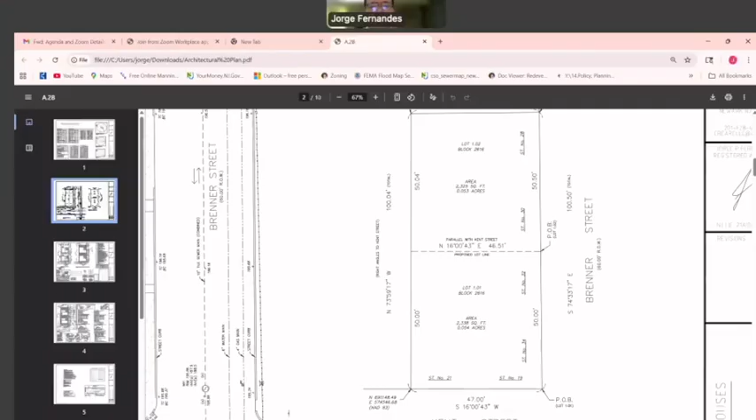Obviously they're slightly undersized. 2,500 square feet is required for a two-family home. But as things stand today, both of the lots are still undersized for the construction of a two-family home.

The proposed site plan, shown on my S2 page, will face Brenner Street as opposed to Kent Street with our entrance and garage. The first house on the corner, instead of having a rear yard per se, will have a side yard that's a grass area 12 feet 7 inches in width. The other house, further into the property, will have a side yard that's 13 feet 1 inch. Those side yards are meant to be used as the rear yard for the property, for tenants to have a green space. That's also where the trash enclosure and HVAC enclosures will be.

Typically in two-family construction in Newark, where we have a lot that's 25 by 100, those amenities are in the back or rear. In this case, we are on the side.

The rear will have a 3'8" to 4-foot setback, as well as a 3-foot and 3'5" setback for the other house. We'll be incurring a variance there because the rear yard needs to be 30% of the lot length, so we obviously need a variance.

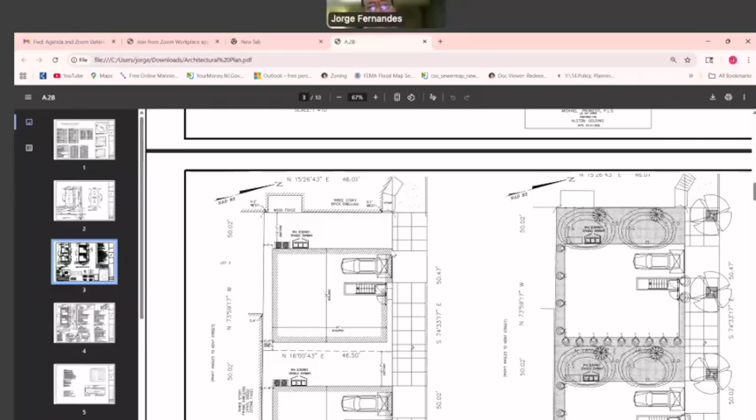I believe we're complying with the front yard setback, as the neighboring property to the west has a frontage on the property line, as do we. We are showing a frontage of our garage on the property line, so I believe we're in keeping with the streetscape on Brenner Street.

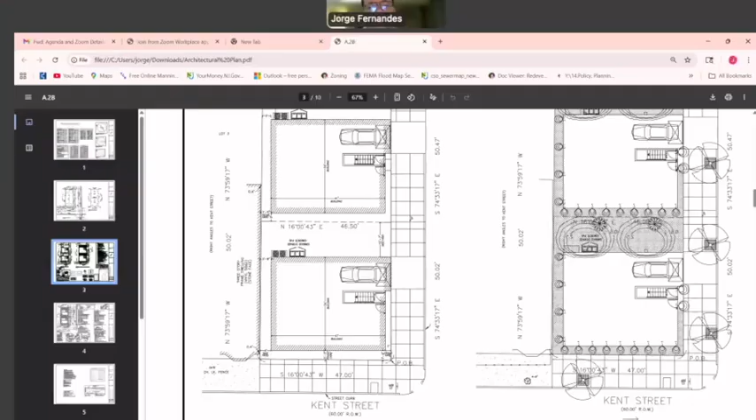The proposed house is 34 feet in width by 41 feet in depth. I can go over the floor plans right after I go over the trees.

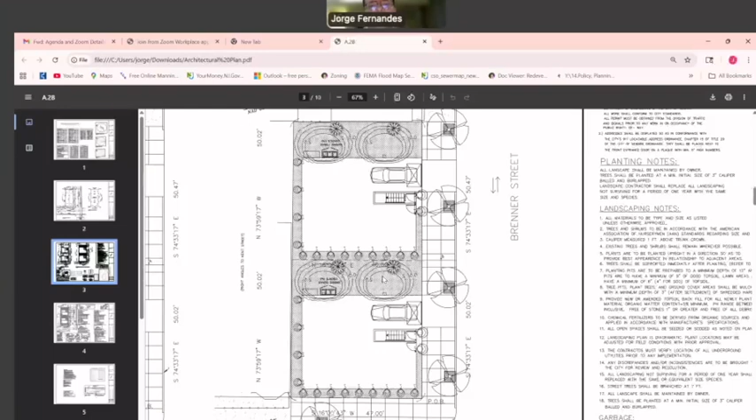We'll be able to plant 4 shade trees on Brenner Street and 1 tree on Kent Street, sidewalk shade trees. We can also plant 2 on-site trees on each of the properties in the side yard, so you'll have 2 trees in the side yard for each of the houses.

The floor plan I could get into now on the A1 of the submitted floor plans. Again, we'll have a 2-car garage in tandem. Now I believe only 1 car is required for a two-family home, but we're providing 2 spaces in tandem. And of course, the front entrance of the house, where you have your front door all the way to the left, gives access to a 573 square foot recreation area that is interiorly connected to the 2nd floor apartment.

These are meant to be used in conjunction, and this is really the only entrance for this apartment. You have this door here to the left that gives you access to both the 1st floor as well as the 2nd floor. And then there's another door that gives access to stairs that give you access to the 3rd floor apartment. The reason we do that is to have separate entrances for each of the apartments, so that we don't have to install a sprinkler system per the building code.

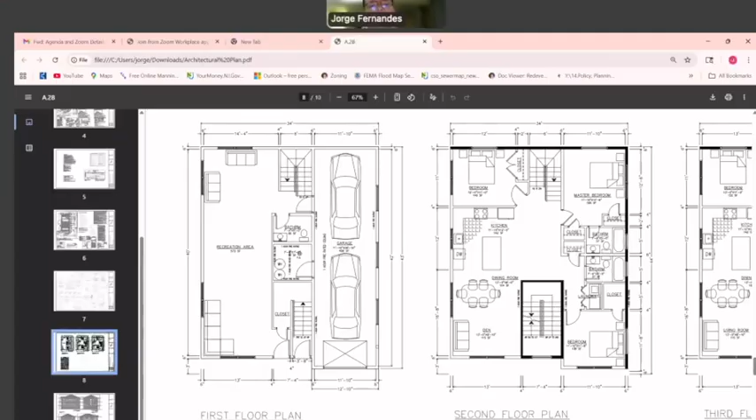The 2nd floor plan is a 3-bedroom unit. It has a kitchen, living room, 2 baths, and a laundry closet, and of course the stair that goes back down to the rec space and to the garage. The 3rd floor plan is also a 3-bedroom with 2 baths, living, dining, a kitchen, and a laundry closet.

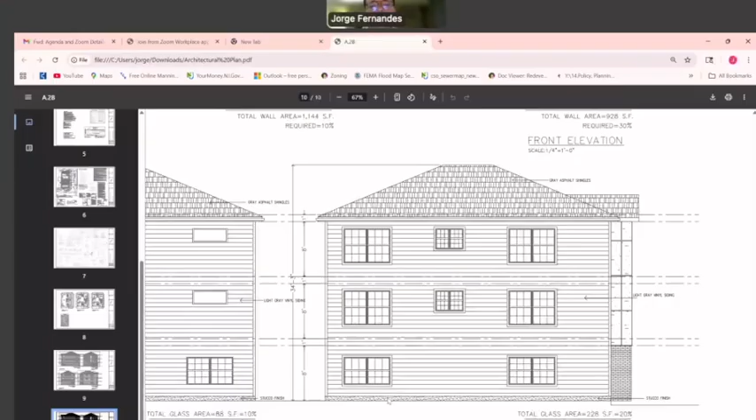This is the house that's further into the property, that is not fronting on the street on 2 sides. Therefore, we only have the stucco finish on the front and vinyl siding on the sides and rear. Again, we are complying with the glazing requirement on this house as well for all of the elevations.

That pretty much concludes my testimony to the project. I'm open to any questions. Commissioners, any questions or comments?

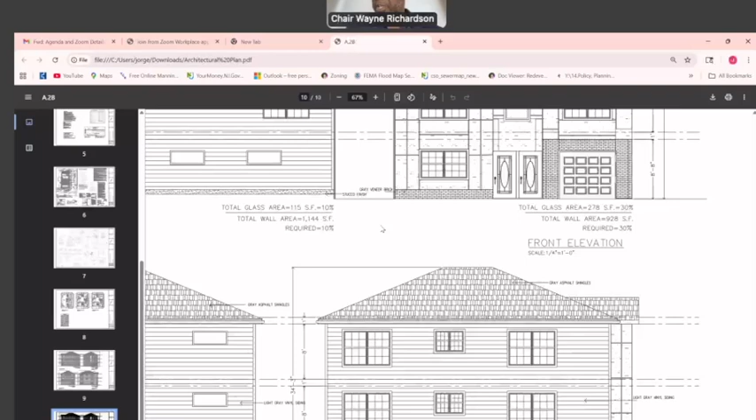I have a question. Did you say something about the sprinklers? Did you find a way not to have to put in sprinklers, or did you say you found a way to put in sprinklers? It's a code requirement. We will not be installing a sprinkler system because we have 2 separate entrances for each of the apartments. So that allows you not to have to put in sprinklers? Exactly.

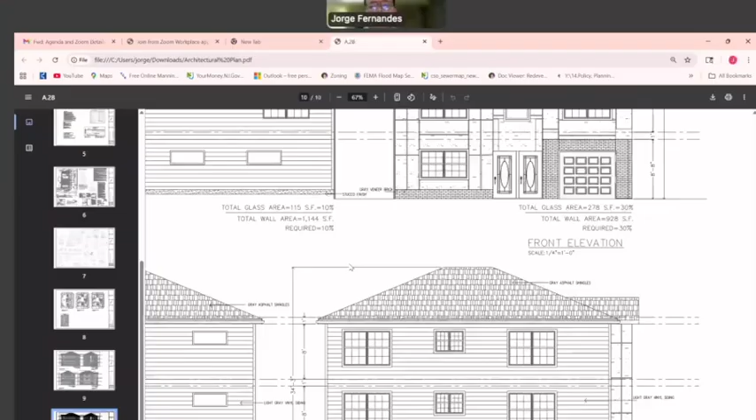Did you put up a color rendering? I have one, yes. Put it up. Here are the houses side by side, again with different colors. One has a lighter stucco finish, the other one has a darker stucco finish. And again, this is the grass on the side yards that are effectively the rear yard of the home.

Mr. Fernandes, what type of material is that on the exterior? That is a stucco finish. Is the entire exterior all stucco? Yeah, we'd have some masonry, brick masonry on the stairs and also around the garage door.

Do you have a rear rendering of this? No, just the front. Okay, and there's no exterior fencing, correct? We'll have fencing in the rear of the building, but not in the front. And what type of fencing is that? In the rear will be a privacy fence, 5-foot vinyl as permitted by the zoning ordinance.

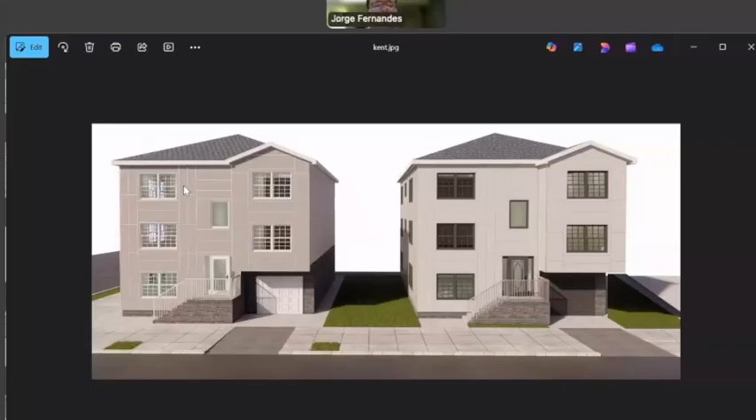And there's no retaining wall. No retaining wall. Thank you. And the back is vinyl siding, right? Yes, the rear. If in this case we're looking at the front, the rear would be vinyl siding. The side on Kent of this house here. I'm sorry, the other side on Kent will also be the same stucco finish. Okay.

All right, commissioners, any other questions or comments? If Mr. Hockaday could just mark this exhibit as A1. Certainly, thank you.

All right, hearing none, any questions or comments from the public? Seeing none at this time, Chair. In that case, I need a motion.

Motion. Second. Moved by Commissioner Roundtree, second by Commissioner Purdy. Roll call, Madam Secretary. Commissioner Byers, Yes. Commissioner Timmons, Yes. Commissioner Scott Roundtree, Yes. Commissioner Purdy, Yes. Commissioner De Silva, Yes. Commissioner James, Yes. Co-Chair Richard, Yes. Chair Richardson, Yes. Your application has been approved. Good luck. Thank you.

Let's move back to number 3 on the agenda. CPB 25-13, which is 96-126 Roanoke Avenue. Joseph Paparo.

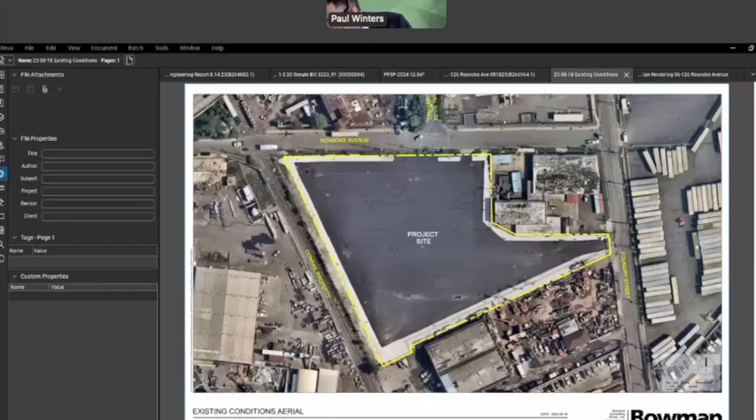This is an aerial of the site in question, titled Existing Conditions Aerial for 96 to 126 Roanoke Avenue. This depicts aerial mapping upon which we identify our project site. This is prepared by our office, dated today, August 18th, 2025. Is it Exhibit A1? Is that appropriate? Okay, great, thank you.

So as I mentioned, this is an aerial exhibit from NearMap, which is an online resource that shows generally very recent aerial imagery, so this is current. The yellow line around the perimeter of the site identifies where our property is located. As you can see, we have two frontages of the street. To the north, we have Roanoke Avenue as our primary frontage. To the east, we also have a limited frontage of approximately 40 linear feet on Foundry Street. Our frontage on Roanoke is about 400 feet. We're adjacent to a few other lots.

There's a lot immediately to our northeast with an industrial use on it that separates us from the intersection of Roanoke Avenue and Foundry Street.

We're also adjacent to an industrial property immediately to our south, which has a truck operation and vehicle storage, which you can clearly see from this image. And we're also adjacent to a Conrail railroad right-of-way immediately to our west, and other industrial uses in that neighborhood too.

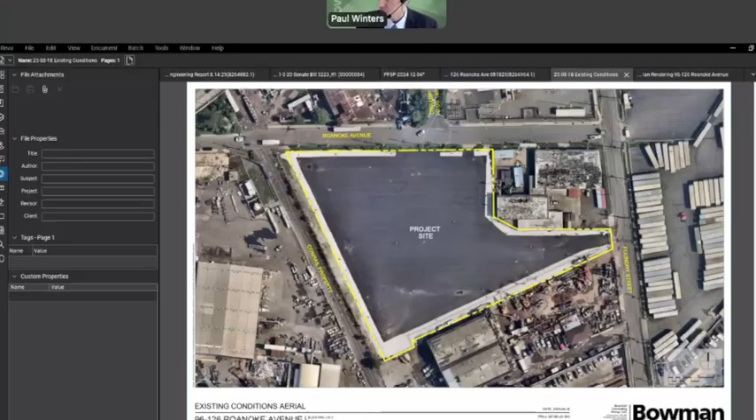Beyond that, I'll also note there's an on-ramp directly to US 1 and 9 to our north, right here off of Roanoke Avenue.

As was mentioned, I believe in the opening, but I'll mention for record, we are in the I-3 heavy industrial district. The existing use today is, as you can see, a vacant site. It has been capped in accordance with environmental remediation requirements. Our proposed use will be to put a truck trailer parking facility on this previously capped site.

The overall site area, just also for record, is approximately 3.29 acres. As you can see, it's been capped, so the majority of the site has a paved cap upon it. That's just a quick overview of the existing condition of this property.

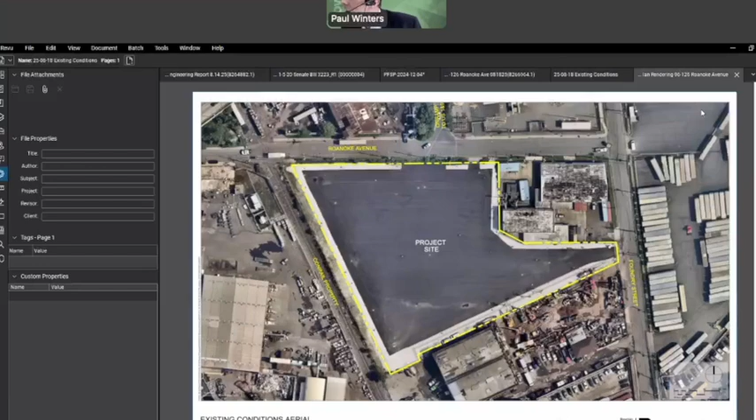I have a secondary exhibit I'll bring up in a moment, which is a similar exhibit, but for the proposed condition, which I assume we're going to sign in as Exhibit A2 in a moment. Here is that exhibit now. This is titled Site Plan Rendering, also prepared August 18th, 2025.

Using the same yellow boundary to identify the outer boundary limit. As you can see, in the center part of the site, the paved cap remains. We're seeking to stripe it and make it available for the truck trailer parking facility proposed on the site.

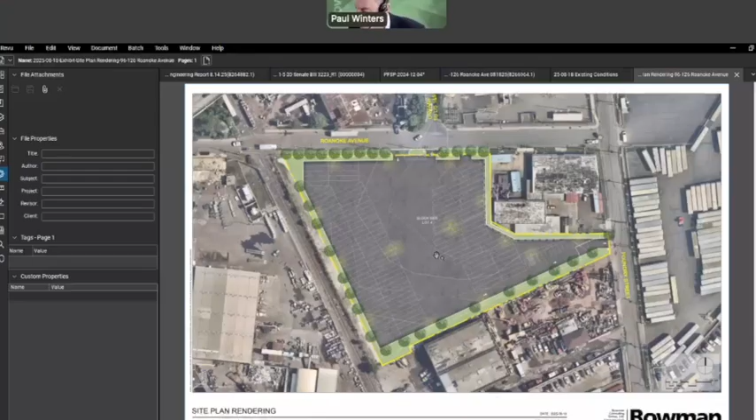Other improvements included with this are site lighting. You can see we've identified those lighting locations scattered through the site. I could zoom in just a little bit for the benefit of the board seeing this exhibit there.

That might be easier. I also want to note with this, and we'll talk about this a little bit more shortly, we are proposing some other improvements, many of which are in accordance with the zoning standards. A new decorative fence, which is a zone standard, is proposed along the frontage of the site. There's existing chain link fence that will be replaced along the frontage with that decorative fence pursuant to the detail provided in the submitted plans. Most of the perimeter chain link fence will remain except for where we're replacing along the adjacent property to our northeast.

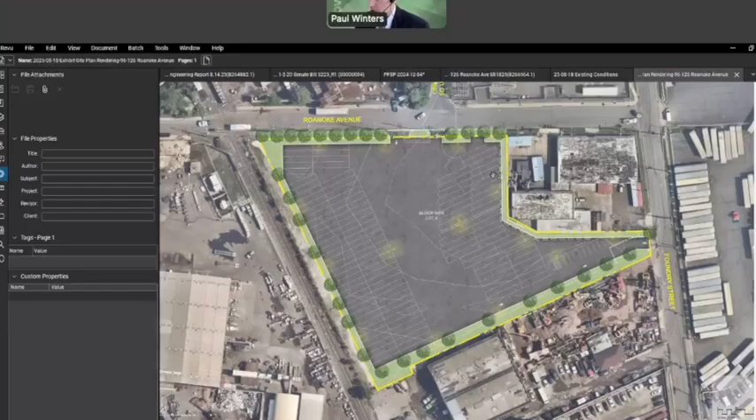We are proposing a number of trees in accordance with both the street tree and the shade or on-site tree requirements. One departure from the submitted plan: in this exhibit we have added additional trees than depicted in the submitted plan. Just want to bring attention to that. It was mentioned in the planner's memorandum, which we'll talk about in a little bit, but also picked up in the engineer's memorandum, which we received Friday, that additional trees are required along the two frontages to comply.

So we've increased the plantings along Roanoke Avenue for street trees. We've added, but we're having a difficult time fitting them on Foundry Street. We only have 40 feet. We can physically fit one, but we're required to have two. We may work out with the board's professionals if we could add that extra one either at another appropriate location on Foundry or on the Roanoke frontage, as there's a concrete apron for driveways immediately adjacent to and along our frontage, which I'll talk about on Foundry Street in a bit.

Beyond that, we're also showing additional trees along the inner perimeter. We are seeking to comply with all the requirements for the quantity of trees identified in the town's memos. As you can see, we're also looking to green up the perimeter of the site, which also helps us meet some other standards in this zone.

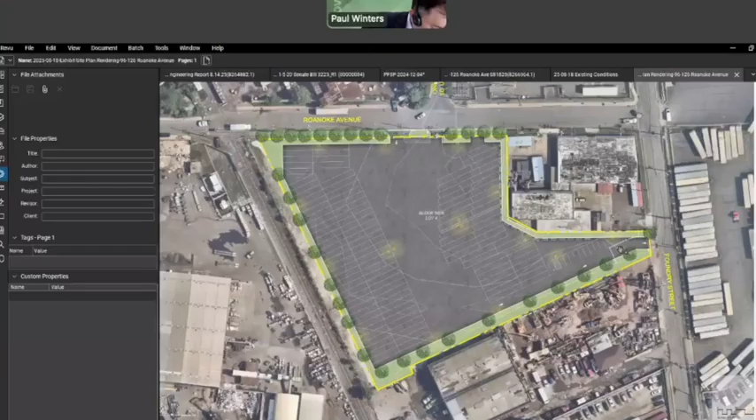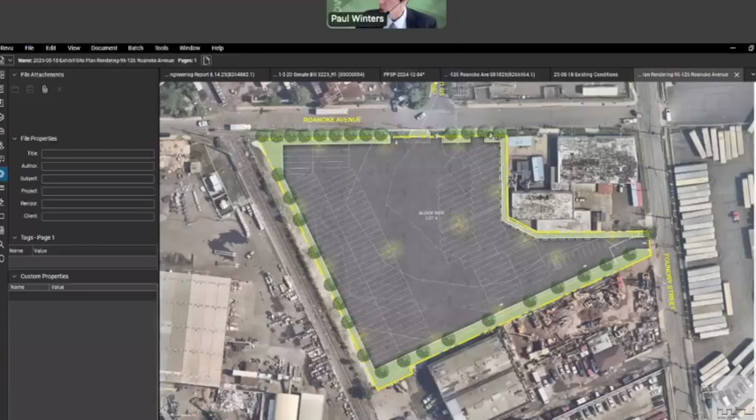So that's a very simple overview of the site as proposed. As mentioned, we're going to have compliant site lighting. The landscaping effectively is our tree plan here. We are proposing to improve or supplement driveways to the site.

We are proposing two separate driveways along Roanoke Avenue, an ingress and an egress. We have split them up because of the location of some utility poles along the frontage, which made it a little challenging to line up appropriate locations for truck access.

There are some variances we'll be talking about regarding that shortly. But there is today one access point, actually to the east of those, which we'll be replacing with these new access points with aprons. On the Foundry side, there is an existing driveway, which we'll be replacing with a one-way out, as we felt that was the most appropriate way to work circulation on the site.

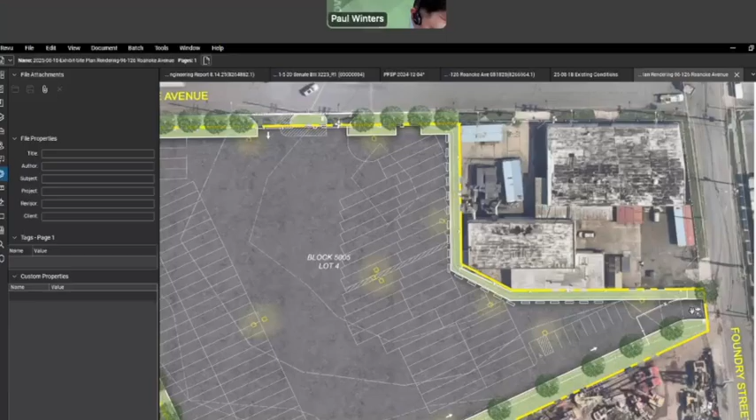See, what did I miss? There's none, I covered that already, sorry.

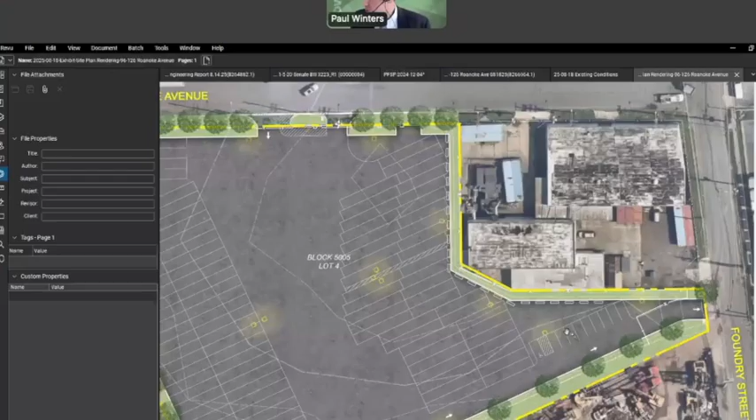Just to note, there are no permanent buildings proposed with this application. As you can see, this is simply a parking facility only. There is room for available parking for other vehicles as needed on the east side of the site. That is the bulk of the specifics on those site improvements.

Mr. Winters, you received the reports from the board's consultants and the city departments? Yes, we have, and I know there's just some extensive comments from the engineer. Rather than taking the board's time going through each item, if there's any items that require a response, please provide that. I know we have our planner coming up next to address the variances, but from an engineering standpoint, please highlight whatever items require further discussion between yourself and the board's consultants.

Yes, I'd be happy to. And I know what I was going to mention just before getting into that. There were a couple items from the professionals' letters which did seek some specific testimony, which for the record I may just briefly put up. And then to that point, Mr. Papero, I also have a summary list of variances. I don't know if you want me to wait until I go through the letters or touch on that right after I go through the remaining testimony points.

Mr. Winters, if you could either way, if you could identify the variances. I know Mr. Hamilton will provide the planning justification shortly, but I know you talked about the driveways on Roanoke, which were done in that configuration due to the utility pole. That does require relief as noted by the board's consultants.

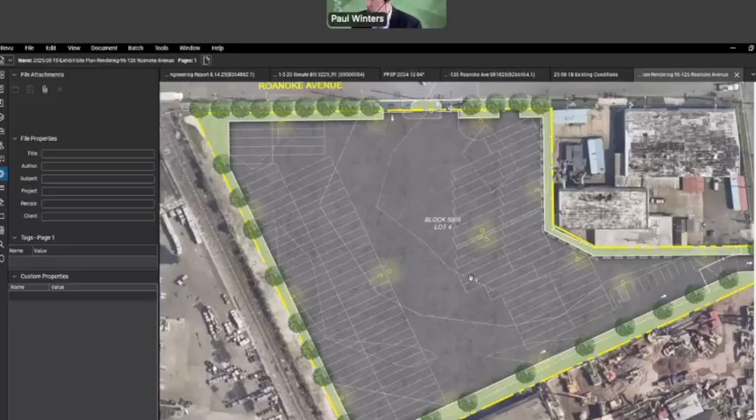They're kind of broken down into categories too. A couple of them have to do with landscaping, and I think I have them grouped. There are 10 identified in total, and many of them are interrelated. On the landscaping front, we are seeking relief where a minimum of 50% of the parking area is required to be shaded after 15 years. However, it's anticipated that our available planting locations, which are limited because of the site cap, are going to result in less than 50% shade of the site.

Another item we're seeking relief from is where a minimum of 15% of the parking area is required to be landscaped. Based on our calculations, the perimeter plantings are achieving approximately 10%. Number 3, where a minimum of 1/10 of the parking area is required to be landscaped with planting material reasonably distributed throughout the parking area as opposed to on the perimeter, we're proposing landscaping only along the perimeter, and again, that's related to the capping requirements. So those three are related to landscape.

The following are related to the driveways, where a one-way commercial driveway is permitted to be a maximum width of 12 feet. All 3 of our driveways are proposed to be one-way. We are not proposing 12 feet; we're proposing wider striping of 20 feet, which is really to facilitate truck movements.

Number 5, where a one-way commercial driveway is permitted to be a maximum width of 12 feet, we're providing the physical width of the 2 driveways along Roanoke Avenue to be, one of them will be 24 feet and the other will be 32. They're striped narrower, but they're paved a little wider. Number 6, where a maximum of 2 driveways are permitted to a subject lot, we propose 3 driveways, and I noted the reason we have an additional driveway is because of the distances with utility poles and trying to accommodate the turning movements.

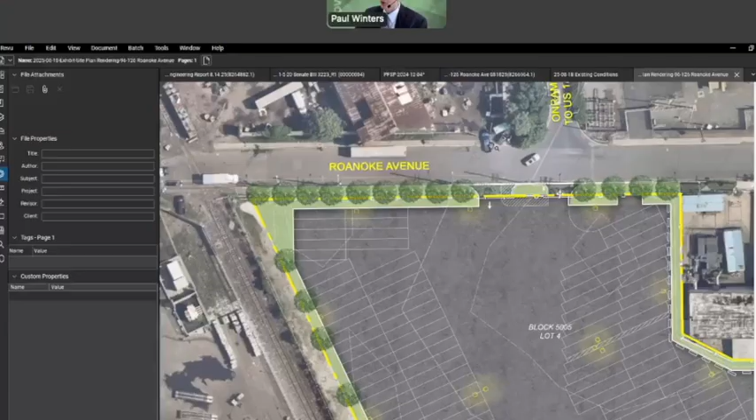We do observe that there is an existing sidewalk along the other side of Roanoke, which is good because it means there is sidewalk serving the neighborhood. From the applicant's perspective, they wanted to prioritize the trees, which we thought made more sense, so we were trying to put that ahead of the need for perhaps additional sidewalk. That was the approach we were taking with this application.

Thank you, Mr. Winters. There will be curbing, which was recommended by the city engineer, correct? Yes, that was a recommendation of the engineer to replace the curbing on Roanoke. I've seen the curbing on Roanoke, I would agree with that recommendation. That combined with the new driveways, the landscaping, and the fence, I think that will be a significant improvement for this property.

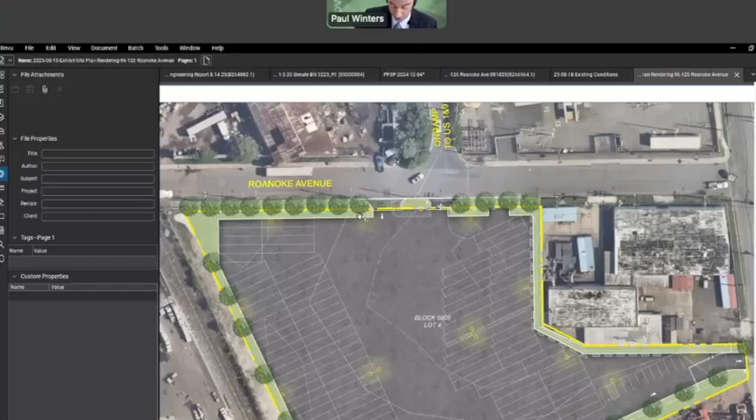Forgive me, it was a decent length letter. I just want to make sure I didn't miss anything important. There was some additional testimony, Mr. Paparo, I did also want to briefly touch on, which did come from that letter. And here it is, and I can speak to it on this exhibit.

One item was the chain link fence along the front, which I believe I've touched on. We're going to replace our chain link fence along the front with a decorative fence in accordance with the ordinance. There's existing off-site fence along our west side, which is on the railroad property, which we're not proposing to touch because it's on the railroad property. We already have a fence along this boundary, which also responds to a question in the engineer's letter, where he sought some testimony from us for the board's consideration.

As noted, the site has been remediated. There are existing monitoring wells on the site, which will remain, and the owner will maintain them for compliance with remediation and regulatory purposes.

For the record, there is an existing access easement along our southern boundary. It's a 24-foot wide access for the benefit of the neighboring property, split right down the middle of that property line. That's going to remain; it's not going to be affected by these improvements. That was the reason I found a challenge putting an additional tree out front, because there's an apron for that. But the engineer was seeking clarification that it would remain and what that was. It's simply an easement to permit access to the adjacent neighbor.

There is an existing retaining wall along the northeast property line, which is to remain in place. It is honestly unclear if that is the applicant's or the neighbor's, but it's going to remain unchanged. Our applicant is replacing the fence on their property, on their side of that wall. Our applicant is on the high side of the wall. It's a couple feet high at most, but that wall is remaining as is otherwise.

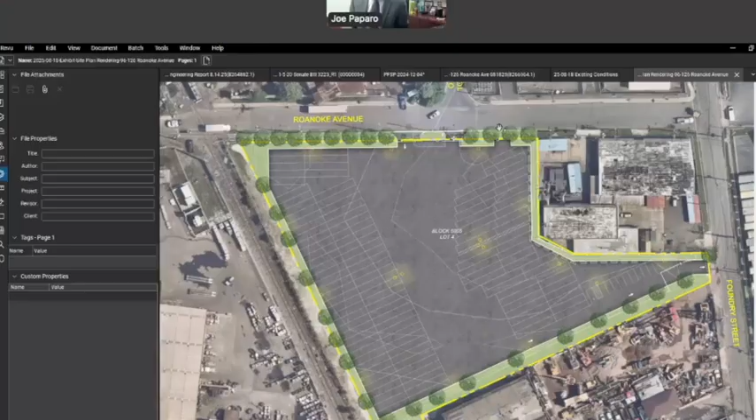Mr. Winters, anything else in the engineering report before we just move on? Those are the primary ones I have, so I think we can move on at this point. Thank you, Mr. Paparo. You also received the planner's report. No objections to those items.

I believe you confirmed on the record that we will comply with the shade tree and landscaping requirements, and those are the conditions of the conditional use, correct? That is correct, we will comply with those conditions of the conditional use. We're going to provide the number of trees recommended per the planner's letter, as well as additional trees per the engineer's letter. The planner's letter identified the one variance needed for the pole spacing, which I already mentioned in my list of variances. The other two variances they identified we're resolving — those were related to the trees.

We will review so we can demonstrate compliance with the sight line and site visibility at the driveways with the landscaping plan. We can take care of that as a condition of approval.

As noted, we are seeking relief from exceeding light spillage on the adjacent property. We will certainly look at that as we finalize plans to see if anything can be done to improve what is proposed. But as it is, we are still seeking that relief in the event we can't improve upon it.

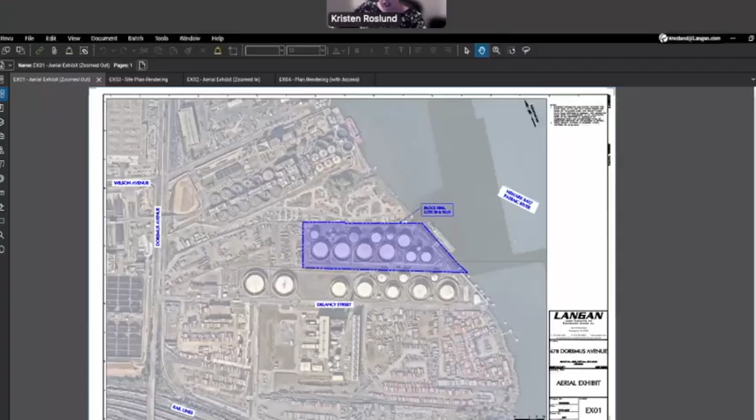So with that, I'll switch over to what we'll mark as Exhibit A2, a site plan rendering showing the proposed condition. The proposed redevelopment is seeking to construct a new parking and storage facility for trailers, containers, and other heavy vehicles. The site will include 445 trailer parking spaces and will generally be secured by a sliding gate near the entrance and a 5-foot high chain link fence around the perimeter. I'll note that both the engineering and planning memoranda identified that the fence on the submitted plans was 6 feet high, which would require relief, but we are lowering that fence height to 5 feet to comply with the conditional use standards.

Just to touch a little more on the operational aspect, this is a tentative, speculative proposal right now, based on the applicant's experience with sites of this nature. So in terms of hours of operations, number of employees, and specific security measures, that is not known at this point, but the application in front of you is based on typical industrial operations. We feel very comfortable with the proposal as it stands.

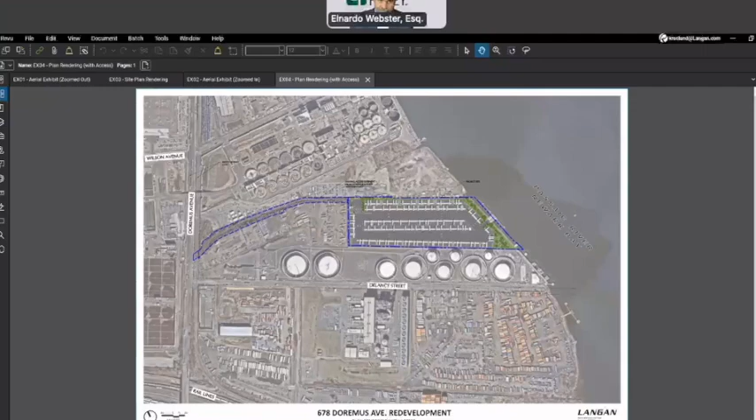Talk to me about stormwater management. Before we jump over there, I did want to just identify the one item of relief we're requesting regarding the trailer parking.

We reviewed the engineering memorandum, and it was identified that the maximum width of any drive aisle is 40 feet for an industrial use. We do have these truck court drive aisles between the trailer parking spaces that exceed that 40 feet, which are really necessary for truck maneuvering and are typical with industrial standards. So we are requesting relief for that specifically tonight. 40 feet is required as a maximum, and we're proposing 108.8 feet, again in line with industrial standards and truck moving templates that were requested by the board engineer to provide more detail on, which we will do as part of the compliance.

So with that, I will move on to stormwater and how we are addressing that. The project is almost entirely impervious in nature, which will be reduced to about 81%. This is a net reduction of impervious coverage by about 3 acres, or about a fifth of the site, bringing it into compliance with regulations for maximum impervious area. We see this as an overall benefit to Newark, providing additional stormwater quality and green space on a site that is fully paved.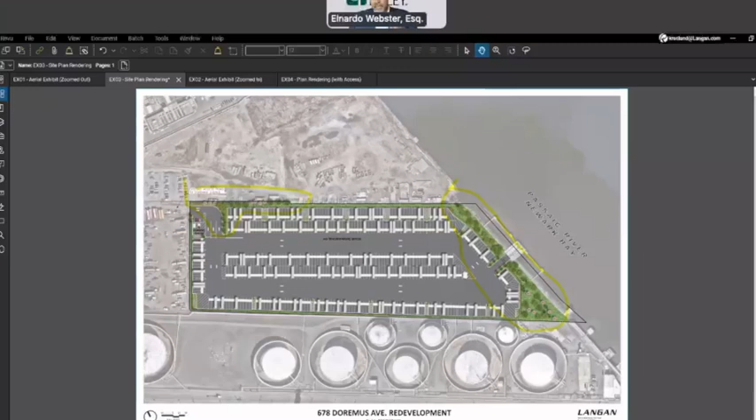I think the challenge is that they're hard to maintain, and this is a big truck parking lot. So what we've tried to do is push them to the outside and do heavy landscaping on the perimeter. If you can expand a little bit, you'll see we do have some aisles with landscaping in the middle—the green portions. We did put some trees in, but the bottom line is that for operation, maintenance, and snow plowing, we don't want them in the middle of the property. So we've tried to accommodate it by putting it everywhere but the middle of the property.

Okay, thank you. Mr. Traficante. Yes, sir. You're still on the oath, sir. Oh, thank you.

Ms. Rosalind, do you have a copy of the Department of Engineering's report to the Planning Board dated August 13th, 2025? I do, yes. Okay, on page 3, under item 3, demolition, there were several items. I don't know if they've been addressed yet, but we're going to go through them so I have something for the record.

Page 3, item 3, Roman numeral 2: Applicant shall provide testimony to the board. Revise the plan to note who owns the existing fence that runs along the west property line between the subject property and adjoining lot 16, block 5066, located to the west. Applicant shall provide testimony as to what impact the proposed development will have on this fence and what will be its future disposition. Can you address that? Yes, there was also a comment about the north and south property lines as well.

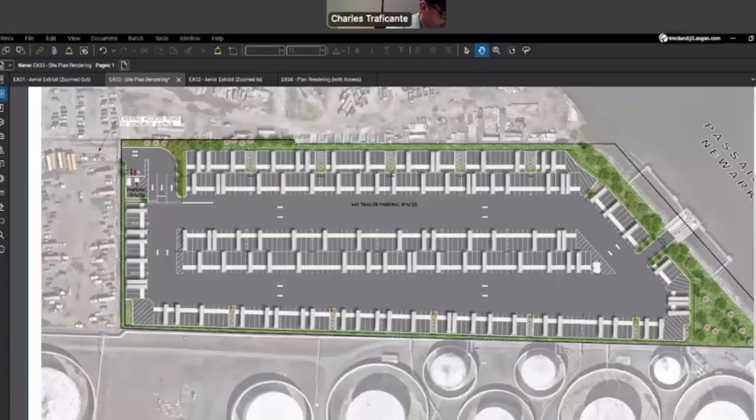Mr. Chairman, my next witness is Rachel Fifield, who's a planner, just to address the variances—I'm sorry, the waivers that were mentioned. Okay, Mr. Beck, let's get us sworn in.

Good evening. Do you solemnly swear the testimony you're about to give shall be truthful? I do. Please state your name and affiliation for the record. My name is Rachel Fifield. I'm a planner with Langan Engineering. I'm a member of the AICP, I'm a PP in New Jersey, my license is current and in good standing, and I have made previous appearances at a variety of boards in New Jersey, including before this board.

Mr. Chairman, I'm going to offer Ms. Fifield as an expert in the field of planning. Yes, you're accepted by the board. Please continue. Thank you, Mr. Chairman. Rachel, you've heard the testimony put forth by your colleague, Ms. Rosalind, addressing the underlying rationale for why the applicant is requesting the various relief. I'm going to ask you to address it from a planning perspective and explain to the board why they can grant the relief we're requesting this evening.

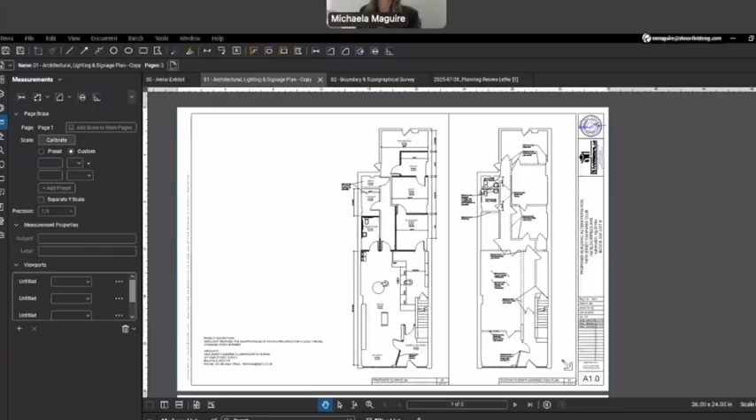Now on to the two main exterior improvements that I'll talk through, which is lighting and signage. I'm going to move down to A3, again part of the architectural set that was submitted. The applicant is proposing two wall packs along the front of the building mounted at 10 feet high. The average illumination along the frontage is about 4 foot candles, and the max illumination is 10.3 foot candles.

There are two specific conditional use standards regarding lighting within the conditional use section that I want to touch on. The first is a minimum of 3 foot candles of illumination shall be maintained within 10 feet of the building entrances. The applicant does agree to show that 10-foot radius in front of this pedestrian entrance, and to ensure that any illumination levels within that 10 feet meet the minimum of 3 foot candles, to make sure we're meeting that requirement and ensuring safety for the property.

The second requirement is a minimum of 1 foot candle of illumination shall be maintained throughout the property. There is a small, atypically sized rear yard in the back of the site. There was light shown on the security plan that was submitted, but the applicant does agree to design the light fixtures in the rear to ensure we are proposing a minimum of 1 foot candle in that rear yard, again to ensure safety. I do want to note, because it was a question in the planning review letter, there is no access to that rear yard from any of the adjacent properties. There is only access from inside the building into that rear yard.

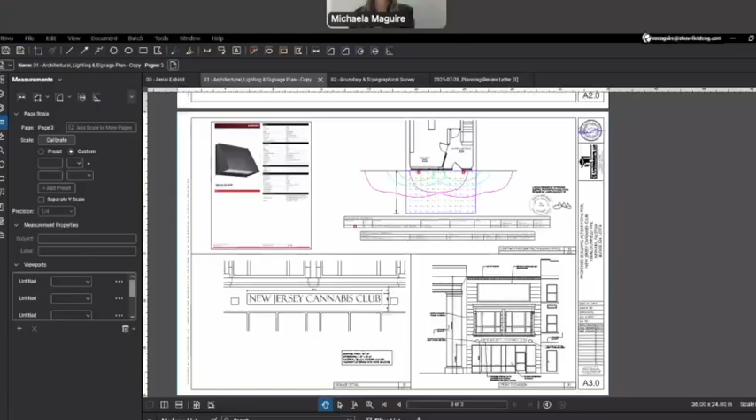Okay, commissioners. Questions or comments?

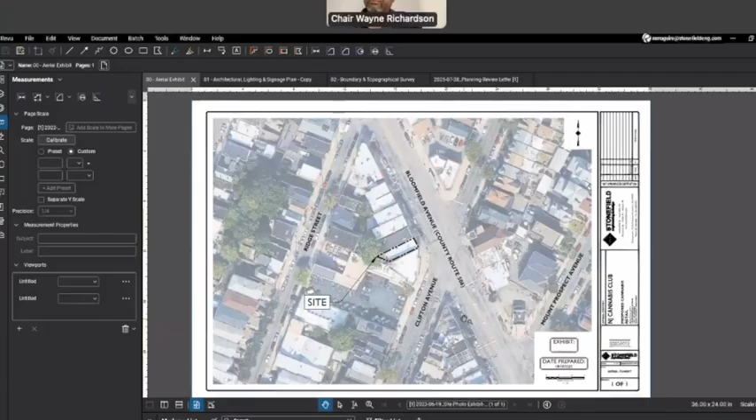Please state your name and affiliation to this application. My name is Daniel Jost. I'm the architect for this project. I'm a licensed architect in the state of New Jersey, also Pennsylvania, Maryland, and other states, and my license is currently in good standing. You're accepted by the board. Please continue.

Thank you, Mr. Jost, you want to share your screen? You prepared the drawings for this application, is that correct? Correct. Can you walk us through the retail location, starting from the outside? I'd appreciate it if you included your knowledge of the camera system, where you would be seen from the outside all the way through to the point of sale and back out onto the roadway. Okay, I think I'll start with a picture of the existing conditions here.

Does everybody see this? Yes. Okay, my screen just went crazy on me, so I apologize. This is the building as it is today. The only improvements that we're going to make to the exterior of the building are removing the sign band at the top, and then removing the canopy that's over top of the main entrance. And then from there...

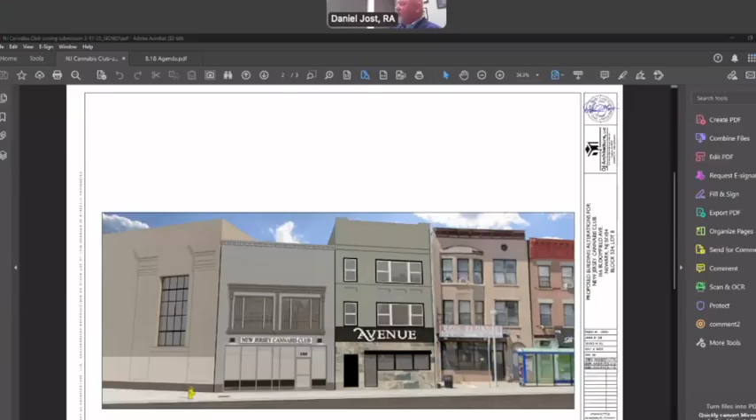As far as the interior of the building, I think Emily Cisneros from New Jersey Cannabis Club's cannabis consultant might be best to go through the security plan as they put that together. I can certainly show you, as you enter the building, you come into a shared vestibule, you're checked by security. This is the retail area here. And then you walk out and you're checked by security again, and you come out, and then you can leave the place. But I think as far as the security plan and all of the glass breaks and everything like that, I think Emily Cisneros is probably best to speak to that.

Okay, can you speak to the security within, as far as the safe, the walls being put up, access to and from?

Sure. So all these dark walls, can everybody see my cursor here? All of these dark walls are the new walls that are being put up. The plan to the right is the existing walls, which everything's going to be pretty much demolished within this space. When product comes in, it's going to be put back into this vault, and the vault is going to be constructed of metal studs with security mesh on it so that you can't easily break into it. So everything is going to be in the vault, and then people from behind the counter here will come through packaging, get the product from the vault, package it up, and then distribute it here at the counters.

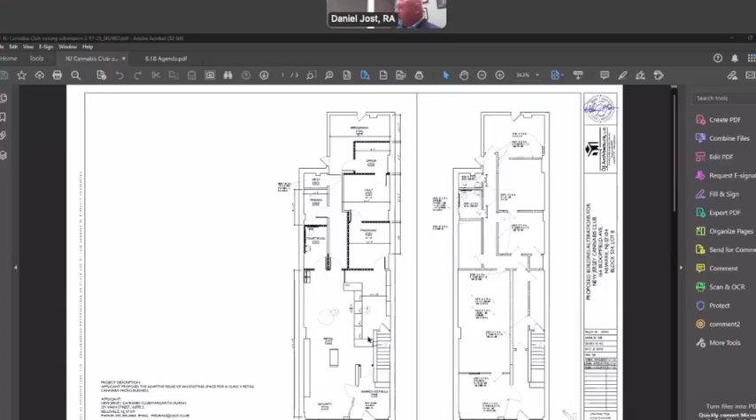Are there any other features of this design that you would like to address? I think that pretty much covers it. It's a pretty simple 1,600 square foot fit out on the first floor. It's basically just a regular retail fit out. And like I said, the signage and the lighting that was covered by Michaela. So I don't really have anything else to speak of on that.

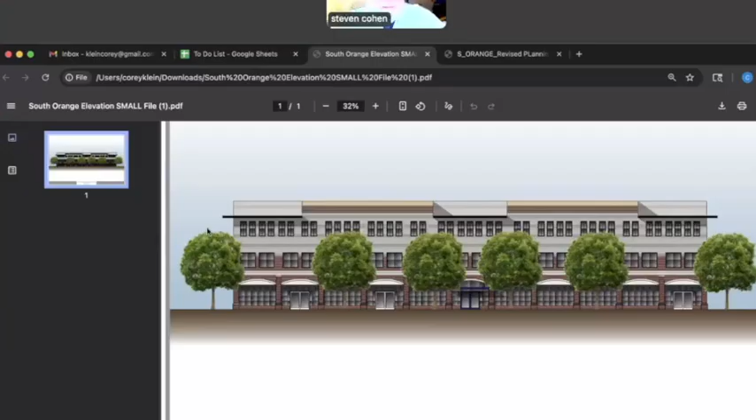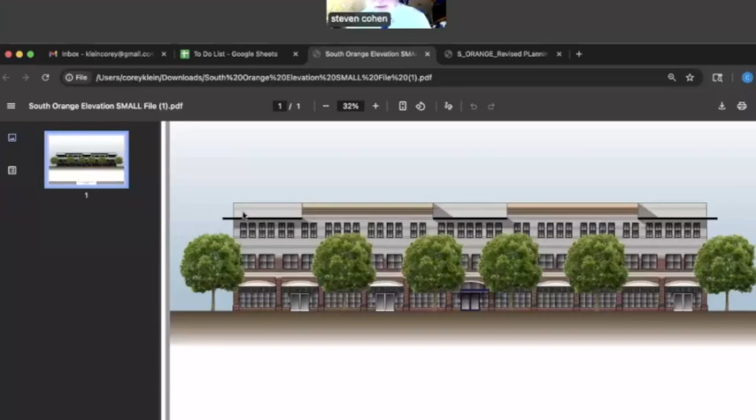Okay, this picture is an architectural rendition of the proposed front elevation of the building. In Ms. Gruel's comments she asked for colors and materials, and we had just gotten the memo on Friday, so I didn't have the chance to make the modifications. This front elevation, which is the South Orange Avenue elevation, only has one pair of entry doors, the one in the center of the building. The other three, the two on the left and one on the right, will just be windows.

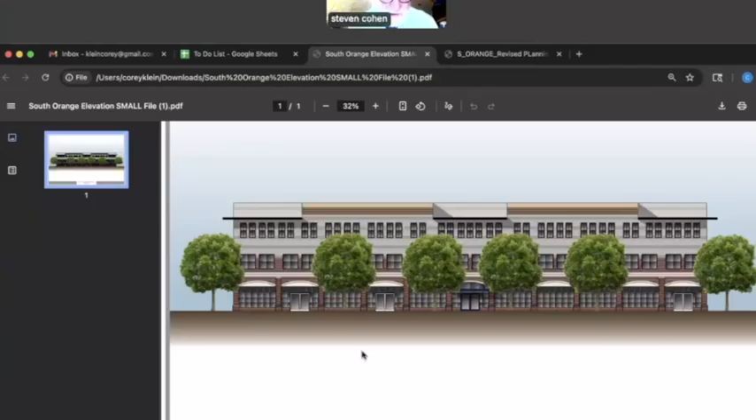The building itself will be 3 stories. It'll be masonry on the first floor with architectural grills along the top of the window, with panels above it, which are going to be HardiePlank, a cementitious panel. Above that will be a concrete band, then brick, aluminum and glass windows, and above that, horizontal HardiePlank siding, then a combination of a flat and pitched, or gabled end roof, with some overhangs. That will be consistent on the 3 elevations, the 14th Street, South Orange Avenue, and the 15th Street. The rear of the building will have masonry at the first floor, then again a similar band, and horizontal siding above it. No brick above the horizontal band. So the building will be, in a sense, pretty much consistent on all 4 elevations.

There was a question earlier in the memo about the height of the building. We reduced the height of the building to 38 foot 5 inches, which is 1 inch under the maximum that's allowable. We modified this after we received the comments on Friday.

Just to clarify, Steve, it's 1 inch over the maximum that's allowable, but it's 1 under what the board would be permitted to grant pursuant to its jurisdiction as a planning board. Yes. Thank you, okay, thank you for clarifying that. So further to that, go ahead. Somebody say something?

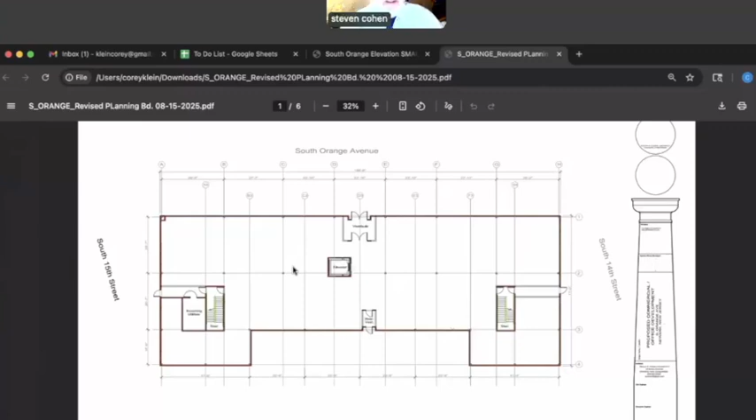Maybe we can go to the next sheet. The next sheet is just this. This is basically the second and the third floors. These will be, again, this plan represents basically open floor plans. If you keep going, I'll explain further.

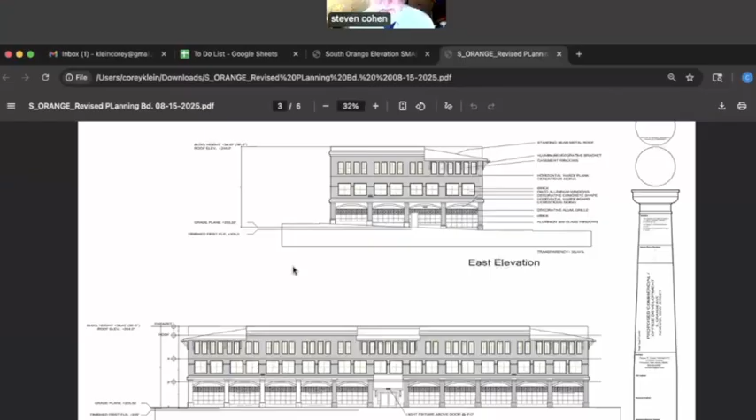The elevations - the comments we received on Friday asked for more detail on the elevations, which we provided in these revised elevations. Also, there was an error in my calculations as to the transparency regulations, and I recalculated the transparency. Although not meeting the standard, it did come up quite a bit, and that's noted just above, like in this one, north elevation - there's small lettering above it. That's the revised transparency calculations.

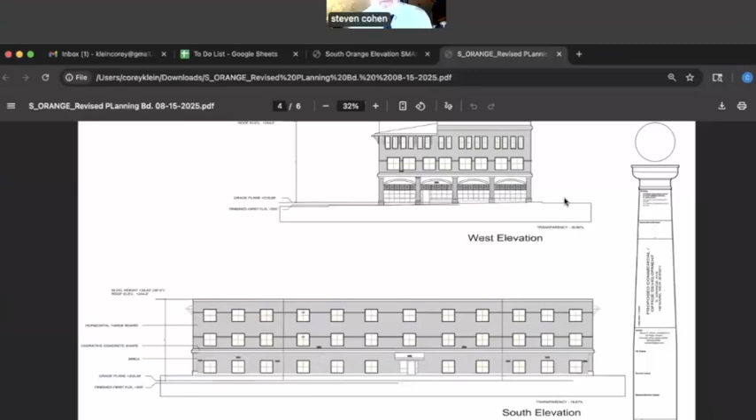And for that rear entrance, does the public have access to that? No, that'll just be employees, staff, and deliveries. And the patients would only be able to use the front entrance? Exactly. Great, okay, go to the next sheet.

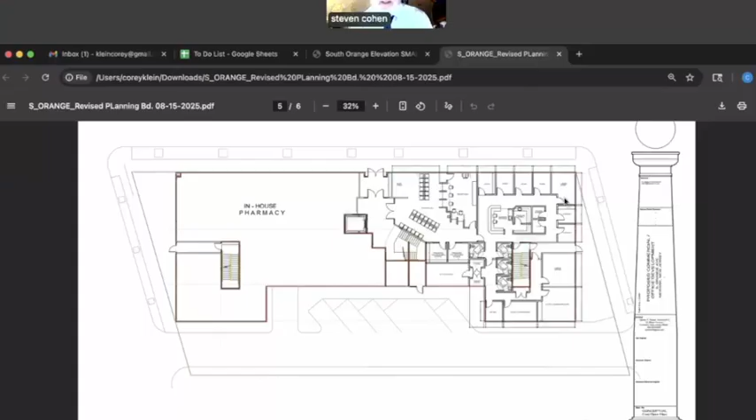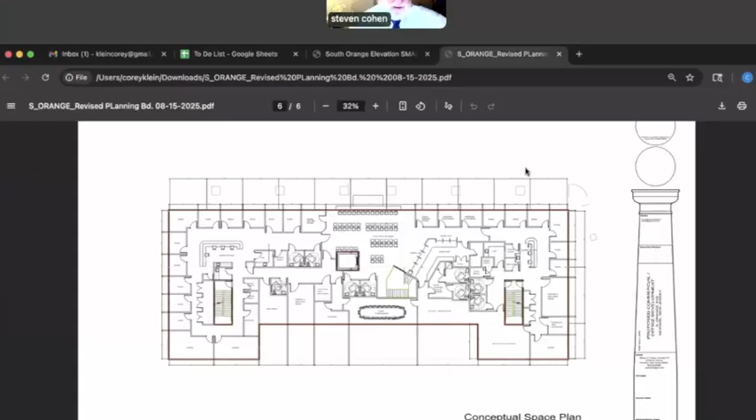I went through the memo prepared by Ms. Gruhl, and I agree with her comments. I've made changes to clarify. The only one I didn't get to on Friday was the signage, and based on the Newark signage regulations, we will comply. We only have one tenant, and right now it's anticipated to be St. James Health, and that identification will be on the front of the building adjacent to the front door.

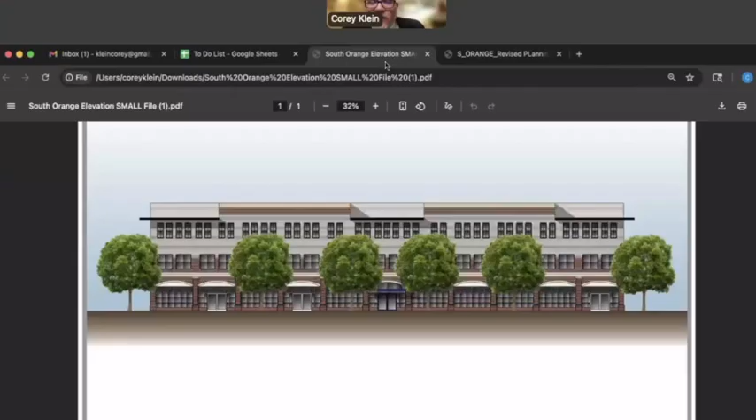Just to back up very quickly, we should have the color elevation that I shared on my screen marked as Exhibit A1, and the revised floor plans that I just walked through with Mr. Cohen marked as Exhibit A2.

Going through Ms. Gruhl's comments - one of them regarding identification of materials on the elevations - they've been corrected. The signage I didn't get to yet, but that'll be on the compliance drawings. I believe I've made most of the other changes in there, but I don't take exception to any of her comments, and I'm in agreement, and we will comply.

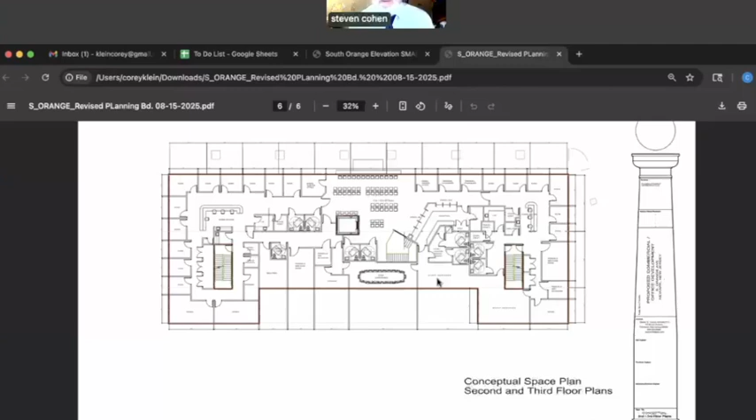That's trying to move quickly through it. That's my testimony. Thank you, Mr. Cohen. Are there any questions for this witness before I call our civil engineer?

I'm just wondering, it's beautiful - if there could be maybe a photograph, some representation of that artwork within the building. Oh, maybe Steve, do you know - and maybe this is a question for our civil engineer - is that wall on our property, or is that the property behind ours? I think Jonathan, our civil engineer, can better speak to that than I can. Thank you.

Next witness, okay, go ahead please. But we can document the mural on the wall, we can photograph it and have that, and put it in the lobby, just to leave a representation of what was there. No problem, much appreciated.

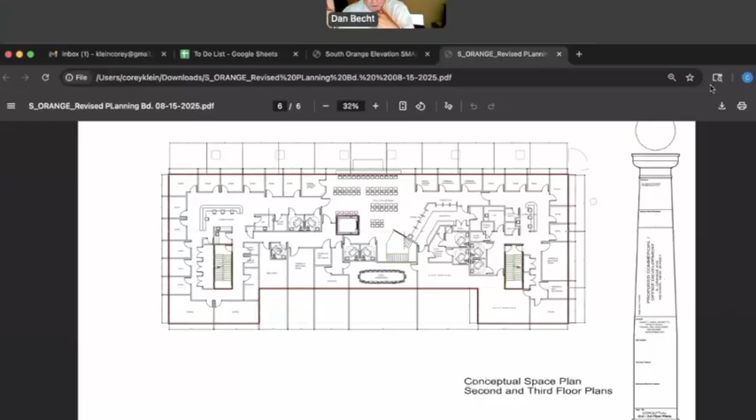Good evening, everyone. My name is Johnatan Zuluaga. I'm with Dynamic Engineering, and I am the project site civil engineer. Great, thank you, Mr. Zuluaga.

Can you provide your background and experience as a civil engineer in New Jersey? Absolutely. I have a bachelor's in science and civil engineering from NJIT. I've been working as a civil engineer for over 7 years and designed multiple commercial, industrial, and residential developments. I am a licensed professional engineer in the state of New Jersey, current as of this evening. I have also provided expert testimony in front of this board in the past. Okay, you're accepted by the board, please continue. Thank you.

Could you please describe your responsibilities in connection with this project? Yeah, absolutely. I was in charge of the site design, overall stormwater management design, and all the proposed site features.

Are you familiar with the West Ward Model Neighborhood Initiative Redevelopment Plan and the zoning ordinance of the city of Newark? That is correct.

Can you please orient the board and the public to the property by the surrounding streets and other relevant characteristics? Yeah, absolutely. Let me share my screen to provide a visual representation. All right, so let's mark this aerial map exhibit as A3, I believe, is where we are right now.

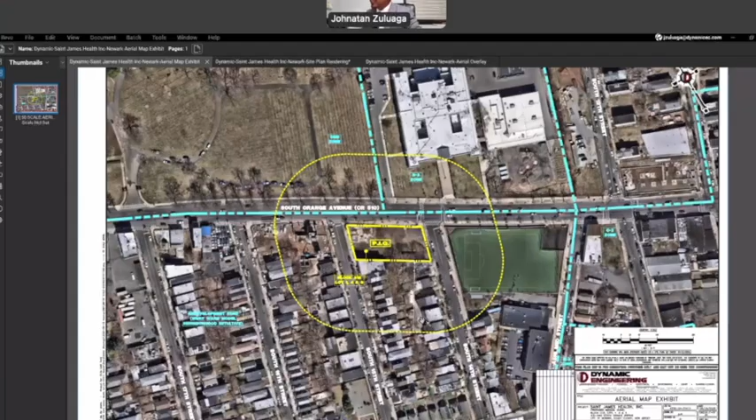As described before, the property is located in Block 318, lots 1, 4, and 8. As shown in the exhibit, the property is surrounded by that yellow thick line, representative of where the site is located. The subject site is, as you can see, undeveloped vacant lots. There's some pavement remaining on the northwest and east portion of the property.

In terms of site access, the site fronts South Orange Avenue, also known as County Road 510, as well as South 14th Street and 15th Street. For topography, the site generally slopes north towards South Orange Avenue, and there are no stormwater management systems present on site.

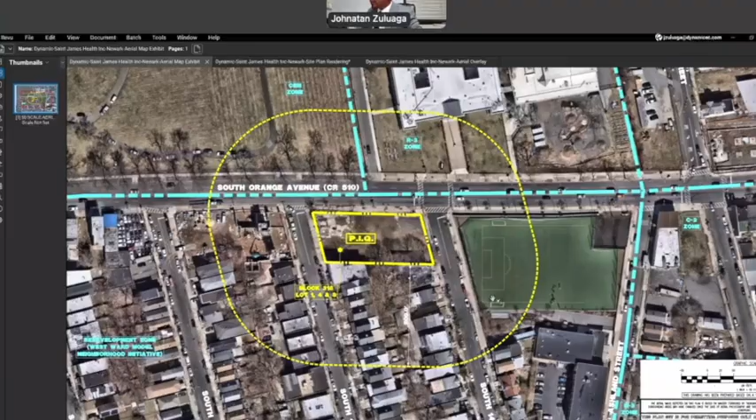In terms of adjacent uses, you have West Side High School to the north and the cemetery on that northwestern portion. On the south portion of the site, you're bounded by single-family residential dwellings. On the east side, you have that soccer field associated with the charter school.

On the west side, the aerial shows a vacant lot, but actually that lot is under construction, what appears to be a multi-story building. The property is located, as Mr. Klein just mentioned, within the West Ward Model Neighborhood Initiative Redevelopment Plan, in the Community Commercial District C2.

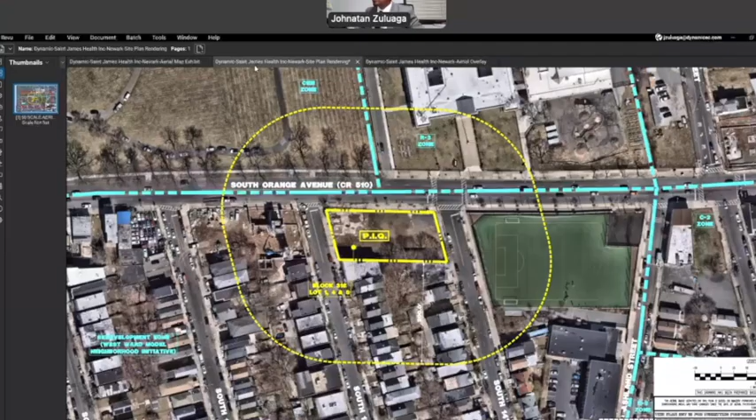Thank you. Could you describe the existing site conditions and what is proposed? Yeah, absolutely. Let me introduce the site plan rendering of what the applicant is proposing. We can mark this as A4 -- this was also submitted to the board as A4. This is pretty much a colorized version of the site plan that was submitted.

As described before, the applicant is proposing a 3-story medical office building, which is a permitted use within the redevelopment zone. Access to the property will be through South 14th Street on that south asphalt driveway with one-way circulation. The applicant is also proposing 45-degree angle parking.

It's important to note, as the project architect mentioned before, that the three-story medical building will have a pharmacy associated with it. In terms of additional site improvements, there will be right-of-way improvements to the sidewalk, as well as some proposed tree pits and curb ramps.

And then there's also a loading area, which was a recommendation in one of the pre-application meetings that we had with the city, which will be used for medical clinic passenger pick-up and drop-off, as well as deliveries.

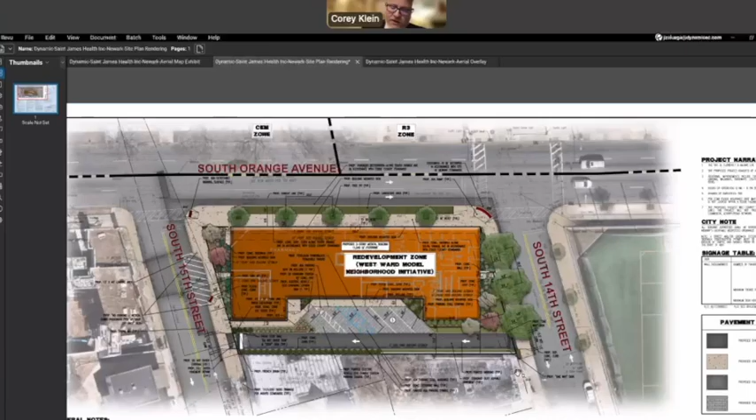Okay, turning to parking and loading. Are there any—I noticed that we provided parking, but is parking required under the redevelopment plan? No, so that's very important to know, Corey. In terms of parking calculations, as explained before, the development is in the redevelopment plan C2 district, where on-site parking is not required regardless of the use or building type. Nonetheless, the applicant is proposing 5 parking spaces, since there's some room in the property to accommodate that.

In terms of loading, as discussed before, we had a pre-app with the city professionals, and given the size of the lot and that we weren't able to accommodate a loading zone within the site, the applicant is proposing the loading area within South 15th Street, as you can see here, with an appropriate ramp. This loading area is 13 by 40. Important also to know that given the size of the building, the loading area is not required, but nonetheless we're providing that area for deliveries that they might get, as well as cleaning, passenger pickup and drop off.

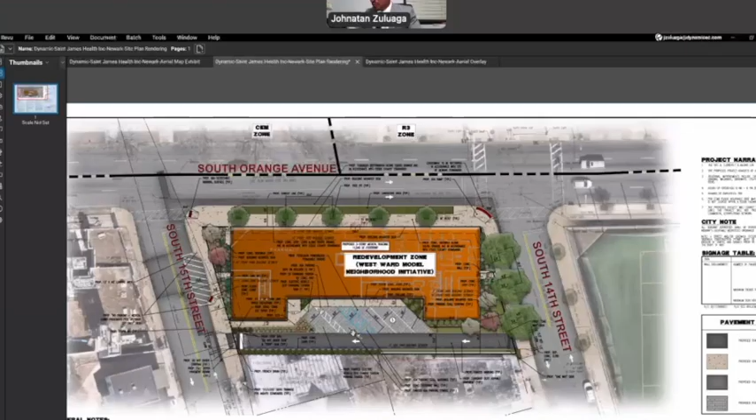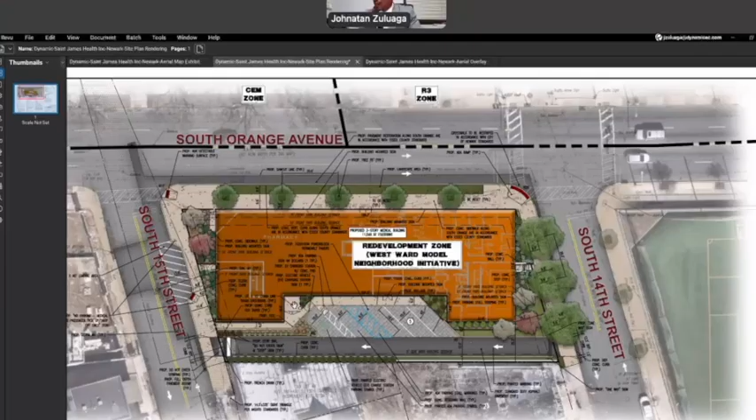For refuse and trash, the applicant is proposing a trash enclosure on this corner of the building, which is the southwest, near the parking area. Trash collection is to take place in the parking area twice a week, outside of business hours, by a private hauler. I believe there was a question from the engineer regarding trash collection and if it will be an inconvenience for the parking and the people utilizing those parking spaces, that they might get blocked by a garbage truck. Since the trash collection will take place outside of business hours, there won't be any issues with that.

In terms of topography, the site will be draining to trench drains placed at the entrance and exits of the driveway, complying with the city code, and will be discharged into a pervious pavement system, which is within the parking area, to attenuate the rates and comply with the city requirements.

Moving on to lighting. The applicant is proposing a few building-mounted lighting fixtures to properly illuminate the site as well as the pedestrian walkways. On that, I have the planner's review memo, which noted a few deviations on design waivers for exceeding some of these illumination levels, again at the property lines and right of way. Since the building is right on the property boundaries and is very close, in order to illuminate the pedestrian walkways and circulation aisles, we'll be seeking relief for that to supplement the existing lighting pole, which is not sufficient to illuminate this for adequate security and proper illumination levels.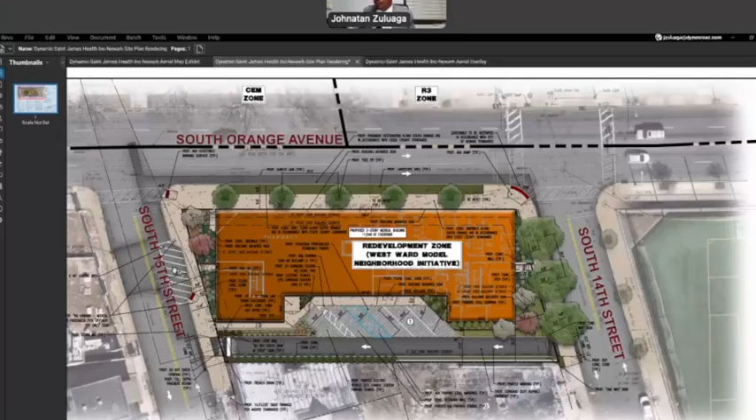Okay great, and when will loading take place? I think you may have touched on this already. Yeah, I briefly touched base on trash collection, but pretty much for loading and deliveries, they'll be able to utilize this loading area if it's small trucks. But in talking with the applicant, they might also be expecting large vans, which they can utilize the parking area for as well. And for trash pickup, as mentioned earlier, it will be performed during non-business hours at the driveway.

Great, and can you confirm that there's a separate refuse area for medical waste? Yeah, that will be stored inside the building and collected by a private hauler. Wonderful, and there was a question about a backup generator. Can you confirm that that's going to be located on the roof and screened? That's correct, confirmed, it will be located on the roof. And we'll clarify the height of the retaining wall as well.

For the retaining wall on the south portion of the building? Yeah. If you give me one second... Actually, we can just clarify it when we provide revised plans, unless the board wants that figure provided at this time.

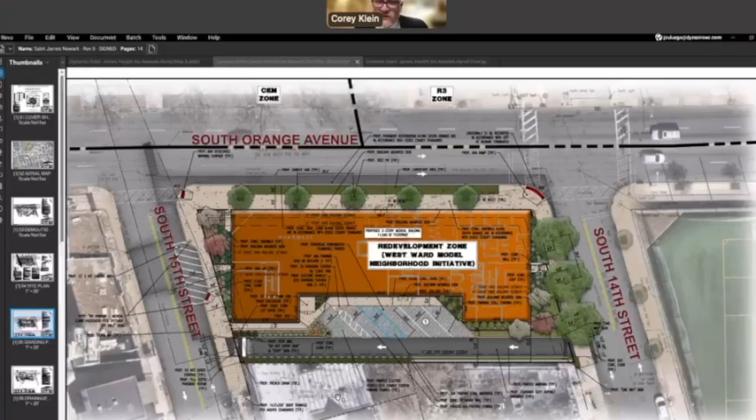And in terms of Mr. Traficante's report, I think there are a couple things we needed to confirm. Can we confirm that there's no easement for the existing building or wall encroachment, and that it's going to be demolished? Also, is that wall where the mural is? Is that on the encroaching wall?

Yes, there's a portion of the building wall that remains inside the property which will need to be removed to accommodate the driveway, as well as the screening and buffering from the adjacent property. As the architect confirmed, we'll make sure to document it, photograph it, and hang it in the lobby—however we can accommodate the city's or the board members' request in that regard.

And I understand that county planning board approval has already been sought and is pending. It's conditionally approved, subject to approval from the city. That is correct. And the separate pharmacy is going to be eliminated, so all comments regarding the separate entrance and separate signage for the pharmacy are no longer applicable. Correct.

And there's no existing underground and/or overhead utility easements that you are aware of? No. And the existing block wall and chain link fence is going to be demolished and replaced?

Correct. Okay, and question for Mr. Traficante—the number of employees will be 50 to 60 employees. Correct. Okay, other than that, I have in my notes that we're able to comply with the comments from Mr. Traficante, unless otherwise testified to.

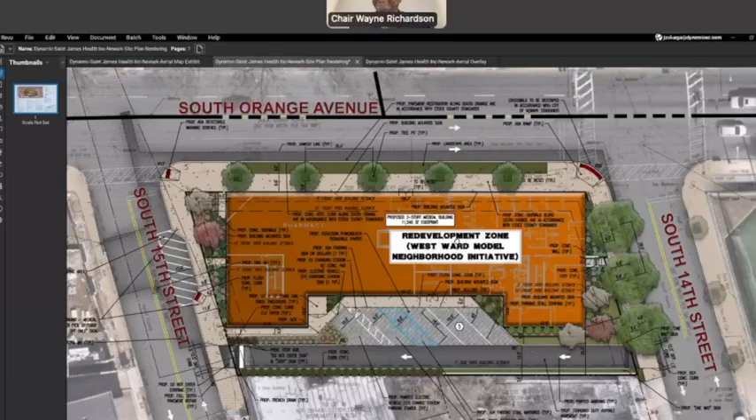Mr. Traficante? I got a comment, Chair. Oh, okay, Commissioner Baez, go ahead.

Yeah, Chair, I just got here. I'd just like to say—this is the first time on this board that I've seen a building coming out for health care. I think that's beautiful, and that's my comment.

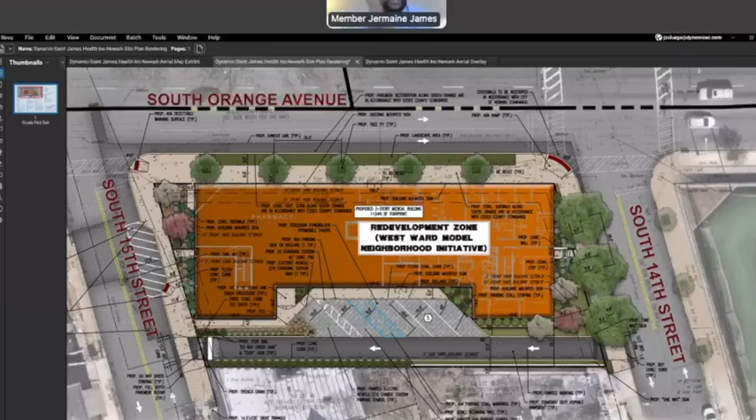Thank you. Commissioner James. Yeah, two quick questions. One, counsel—so is this a joint venture with the city, or what's the collaboration with the city on this?

I can answer that. The city owns the property, and the applicant has entered into a redevelopment agreement with the city, and has a contract to purchase the property from the city. That redevelopment agreement was executed some years ago. At this point we have not closed on the purchase of the property, but it is solely a venture from a not-for-profit organization, St. James Health, Inc.

Got it. No, definitely a great use specifically for that area. Second question—outside of the medical purpose, is there any other community benefit or collaboration, considering the amount of schools in that specific area?

I think our client, Nicole Fields from St. James Health, should be on the call and available. We do have an excellent relationship with the school across the street, and the principal of that school is aware of our project. We're certainly eager to find ways to work together and collaborate with the school. But as of right now, it's going to be solely occupied by St. James Health, with the exception of the third floor, which will be specialty care services run by RWJ Barnabas Health.

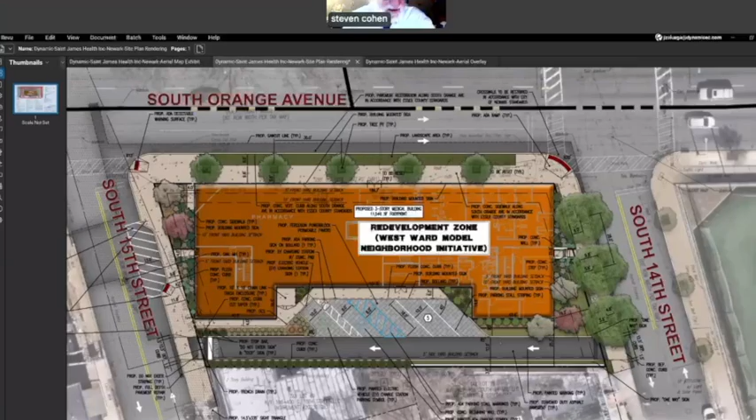All right, last but not least, your proposed loading zone. Since you're still proposing a pharmacy, right? Is that correct, that as part of this application there is a pharmacy still proposed? In-house, yeah — this is Steve Cohen, the architect. It's an in-house pharmacy, not open to the general public.

Nevertheless, as a pharmacy, they still require deliveries of medical goods on a daily basis, or not daily, weekly — is that correct? I would imagine, yes.

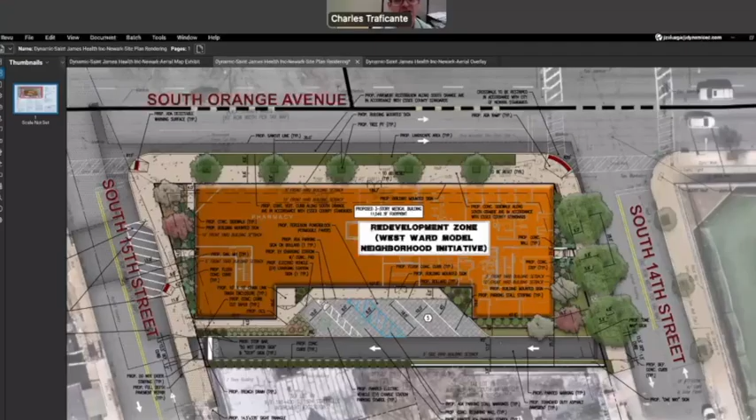That being said, I assume your proposed loading zone for delivery of medical goods to the pharmacy will be where? In the back. In the back or on South 15th Street? In the back, off hours.

And you're going to need relief from the loading space dimensions — there are minimums; if you provide a loading zone, it has to be a certain size. These deliveries are going to be in small vans, not big trucks. So basically, one of your parking spaces is going to be used as a loading zone. Pretty much — it might be, they might just move it.

in, drive in, unload the van and keep going.

All right, but nevertheless you're going to need relief from section 41:8-6-1, if it's not 40 foot long, but I think 10 foot or 12 foot wide, whatever the dimensions. Fair to say you won't have that? You don't have that, and I don't think you plan to provide it. Yeah, that's correct, we'll seek that variance, just given the nature and operations of the use.

All right, otherwise Mr. Zuluaga, can your client comply with all the other comments in the Department of Engineering's report to the planning board dated August 12th, 2025? That's correct, we reviewed and we don't anticipate any issues complying with the requirements. And again, we'll work with the board professionals to address them.

All right, no further questions. Thank you, Mr. Traficante. Commissioners, questions or comments? Commissioner Baez, you got your hand up again? Yeah, Chair, thank you, I just have a quick question.

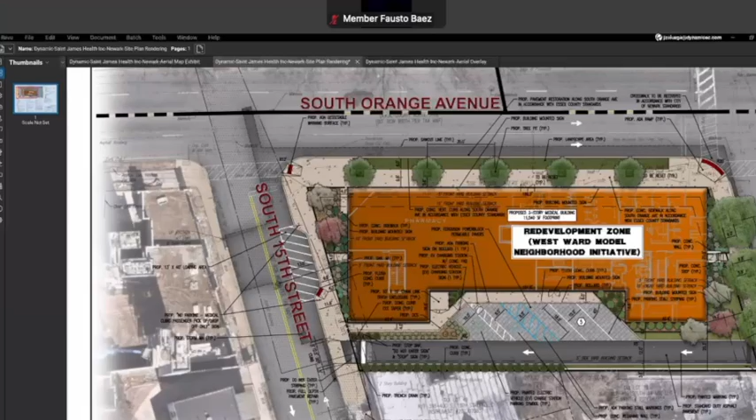Commissioners, any other questions or comments? Hearing none, next witness. Okay, with that I'll call my third and final witness, Mr. John McDonough. Good evening, Mr. McDonough. Do you solemnly swear the testimony you're about to give shall be truthful? Yes, I do. Thank you.

Please state your name and affiliation for the record. Sure, my name is John McDonough, and I'm the project planner. Thank you, and you're accepted by the board, please continue. Thank you, Mr. Chair. Okay, Mr. McDonough, if you could please explain for the board what you did to prepare for this hearing.

We conducted a standard planning analysis in connection with this application. We reviewed existing conditions, proposed conditions. We looked at the relief that the applicant is seeking as laid out in your professional's letter. Overall, relatively light relief in the context of the overall application and the extreme weight of the public benefit that's going to be provided here. And we'll apply the statutory criteria, which in this case is the flexible C balancing test, where we look at the benefits of the application as a whole substantially outweighing any detriments with that relief the applicant is asking the board to move on.

Okay, very good. So if you could describe the site from a planning perspective, and feel free to share your screen and present any exhibits that you've prepared. Okay, so the site will pretty much speak for itself. And again, Carissa, I will get you a copy of this. Are we A1 still for the record? A2? We're on A5.

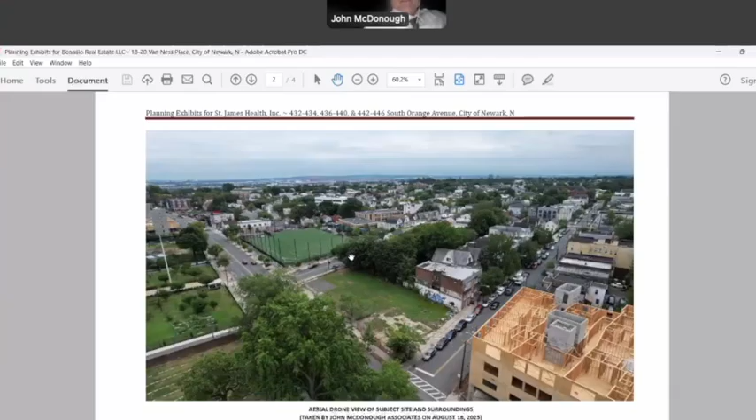And as Co-Chair Witcher said, we do have a very nice mural on the side of this adjacent building that we're going to pay homage to by pulling that as a feature into the building as well, as a photograph or some other element. Again, you've got the field, you've got the cemetery, you've got the new building coming online. And bear in mind as I go through these, the main relief that the applicant is asking the board to move on is height relief, which is actually very de minimis height relief, less than 3.5 feet.

So if we look at the context of the surrounding neighborhood again, this is not going to create a building that's going to overpower the area, but actually is going to blend in nicely, not only with the physical characteristic of the area, but within the confines of the zone scheme as well.

The applicant is asking the board to move on setbacks as well, as you just heard through Jonathan's testimony. But that's reasonable here, given the fact that we are essentially following the line on the street and the established lines in the neighborhood as well. And we'll look at that as we have a multi-story building across South Orange Ave as well.

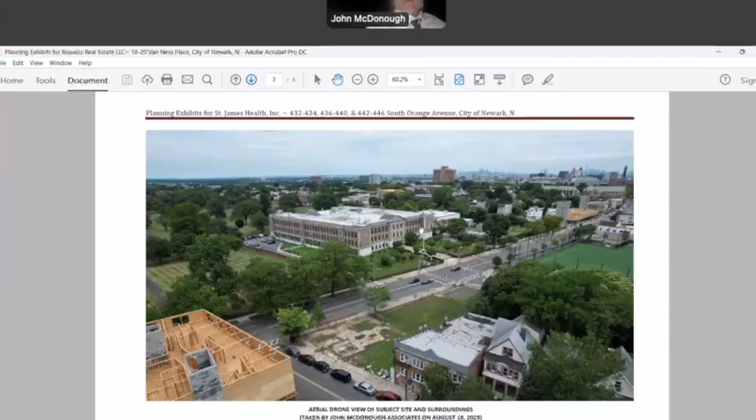And then finally, just the top-down view, again, to show how infilling, going to the setback lines, is not going to upset any neighborhood pattern, but actually maintaining good consistency with what we see out there from a physical planning standpoint. The project benefits here are numerous.

At the top of the list, the promotion of Purpose A in the land use law, the promotion of public health and welfare, is fundamental to planning. It's the very first purpose of the land use law, and that's spot on with what this healthcare use will do. We also see Purpose M, or efficient use of land, taking an undeveloped lot, a vacant lot, and putting it back to productive use is spot on with what we see in the master plan, a recurring goal over and over again.

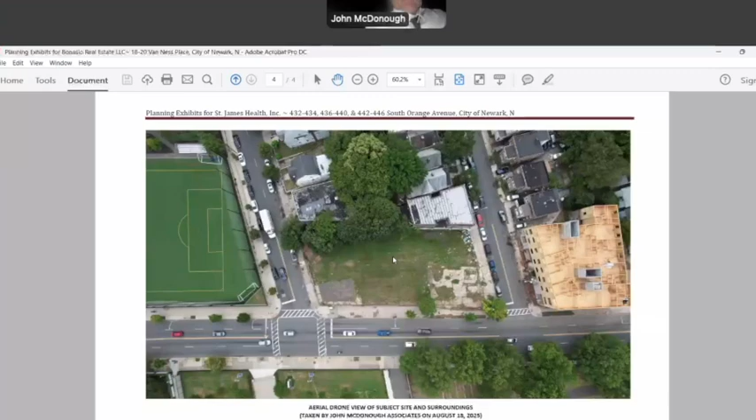Purpose I, the promotion of a desirable visual environment. That beautiful building that you saw Stephen show at the outset. And then, of course, Jonathan showed the beautiful landscaping that's going to complement it.

Anytime one goes to a medical facility, there's, for most of us, some sort of angst that goes with that. And if we can beautify it with landscaping, as our applicant is doing here, that brings some comfort. And we think our applicant has done a good job in that regard.

The applicant is asking the board to move on the landscaping in the parking lot. Sort of unnecessary when you have a parking lot of only 5 spaces. There's not a lot to break up. And by allowing that parking relief, it would allow for more landscaping on the perimeter, which we think goes towards the planning goal for a positive and aesthetically desirable visual environment.

The list of relief has been hit by Jonathan in terms of the specifics. Again, we're looking for height relief. Suffice it to say here, there's nothing about this application that will violate any of the purposes of height control. We're not creating a building here that's going to overpower the corner. It's actually going to nicely anchor and fortify the corner.

It is not going to block scenic views. It is not going to create negative shadow effects. It is not going to create a population density that would exceed the carrying capacity of the land. For those reasons, we believe that height relief can be granted without any substantially adverse impacts to the neighborhood.

Likewise, for the coverage relief, we think this is an effective blend of what's around it. And then the rest of the relief is predominantly design related, as I just said, the parking lot landscaping, some insufficient shade trees and buffering. I believe the refuse screening is now going to be compliant through Jonathan's testimony with a 6-foot high fence. And the illumination, again, was addressed as reasonable and appropriate through design expert testimony as well.

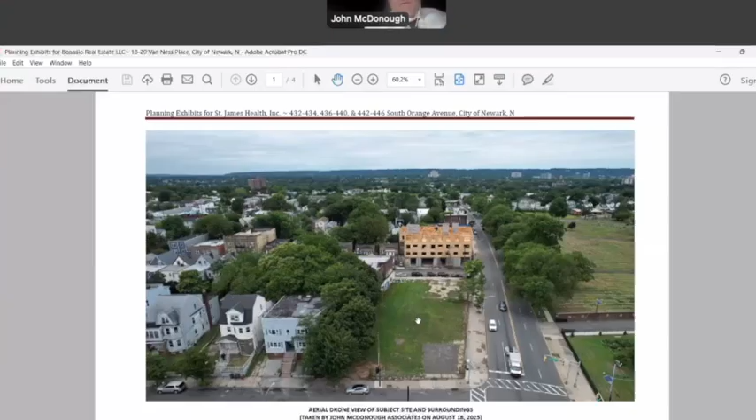Also, this application is on the positive side. This is a very, very good application under the balancing. The relief here will be minimal, if any, and I believe the board can move favorably under the C2 as a better zoning alternative for this property. With that, I would offer that the statutory criteria are met and approval is warranted. And Corey, I don't know if there was anything else you wanted me to say.

I don't think I have anything further.

So with respect to the loading zone, relatively short duration here. This is not where you have the big truck coming in that's going to provide food for the whole week, or where that truck is on the site for a long time. Smaller trucks, smaller duration, would warrant that relief. Smaller vans, I should say, they're not even trucks.

Thank you, Mr. McDonough. Commissioners, any questions or comments regarding this application? Hearing none, Madam Secretary, any persons from the public wishing to speak? Yes, Chair, I believe we have one. Okay, let's get that person sworn in.